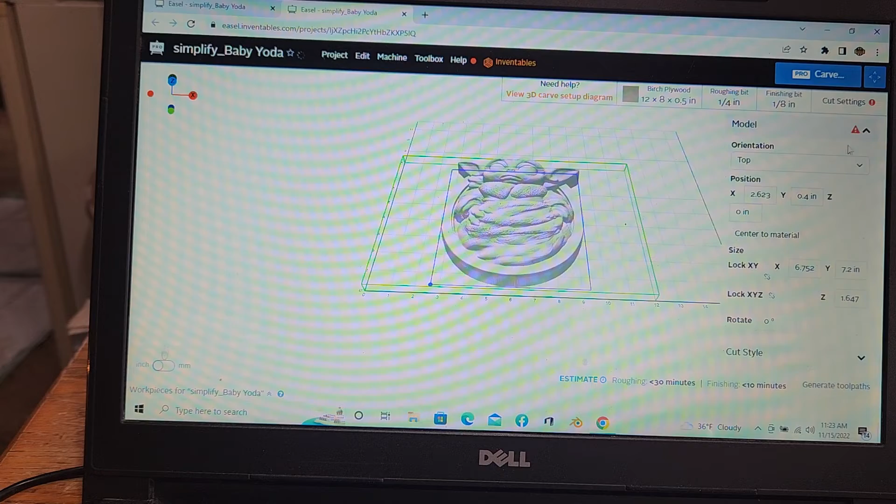Now, as you can see, we have Baby Yoda up on the screen. Now, if you look over in your upper right hand corner, you're going to see you have a warning right here. That's telling you that your model height is higher than your material.

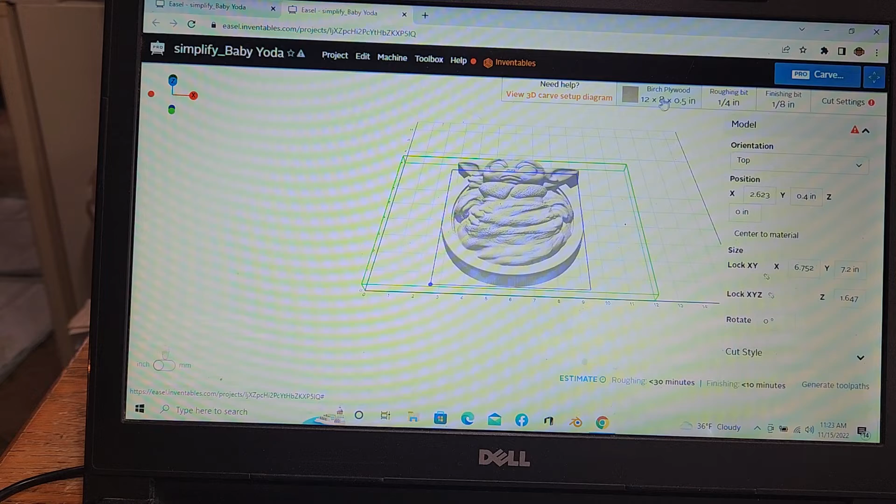So if you'll notice up here where it says birch plywood, type of wood doesn't really matter, and it says 0.5. That means our wood is only a half an inch thick and our model is higher than the thickness of our material. So we're going to change that to 0.75, which gives us 3/4. Now you'll notice we still have our little warning up here.

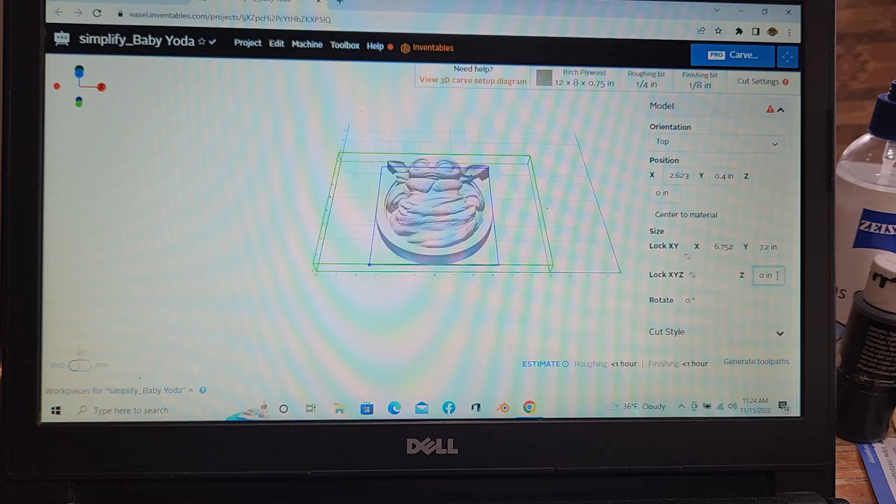The reason being is the Z height right here, down on the lower right. It's a Z by itself. It says 1647. We're going to clear that, and we're going to put in 0.5. And you'll notice your model height dropped, and your warning on top up here went away.

So now that we've done that, you can rotate the material and you'll see that the height of your model is way below the top of your material height, which is the green line on top. So we're going to go back to Z, and I'm going to change that to a number 7. And you'll notice your model height came back up. That's pretty much as high as you can go with this model, with the 3/4 thickness material we're using.

And I will show you what I mean. I'm going to take it to a number 8. And you'll notice we got our warning back up in the upper right hand corner. That says you made the model too high. So we're going to take it back to 7. That's our limit we can go with this model.

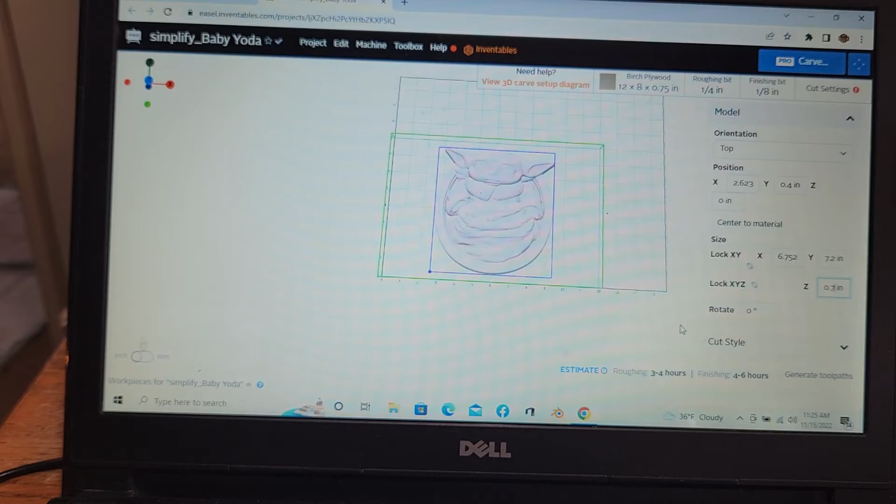Now this is going to be a full cutout. So we'll go down here over on the right hand side, and you'll see full depth cutout with tabs. And if you click on this, it gives you rectangle relief and another boundary relief cutout. But if you're just going to stay with full depth cutout, it's a good beginner one right there.

Easel will do tabs, but they're so thin that they break out. You want to back this up with some double-sided tape. What I do is I take painter's tape, I put it down on my spoil board, then I put the double sticky tape on top of that, and then guesstimate about where the center of my model is going to be when I put it down. And when you make your carve, that way it'll hold it down. It won't let it move.

Easel will cut out, but the tabs are so thin it either will not leave any, or they're so thin they won't hold the material in place. So if it comes loose, you're going to ruin your project. Now when you move down to the direction of your finishing cut, you'll notice that the blue one, x-axis, is lit up.

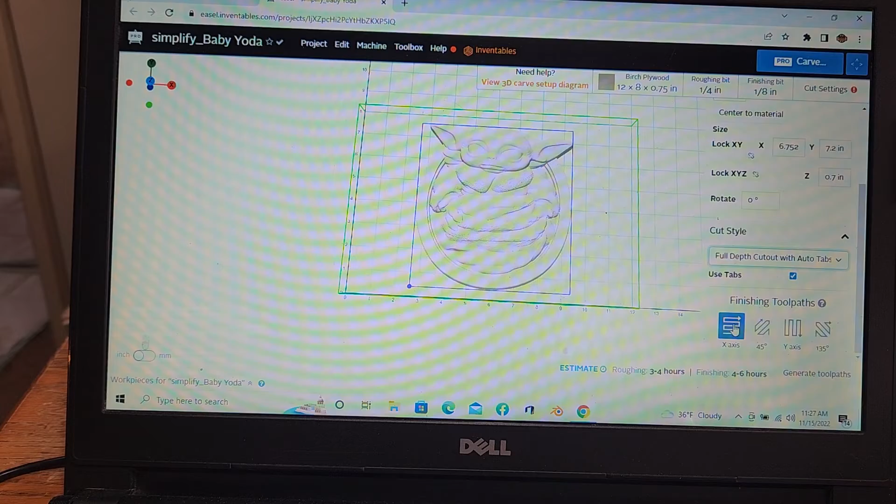That means if your material is turned this way, so your grain runs left to right, when it carves, it will start and carve with the grain, which will give you a very smooth cut. Now, if your material is turned this way with the grain running bottom to top, you want to use this setting, and that way it will start on the left or the right and carve back across the material with the grain.

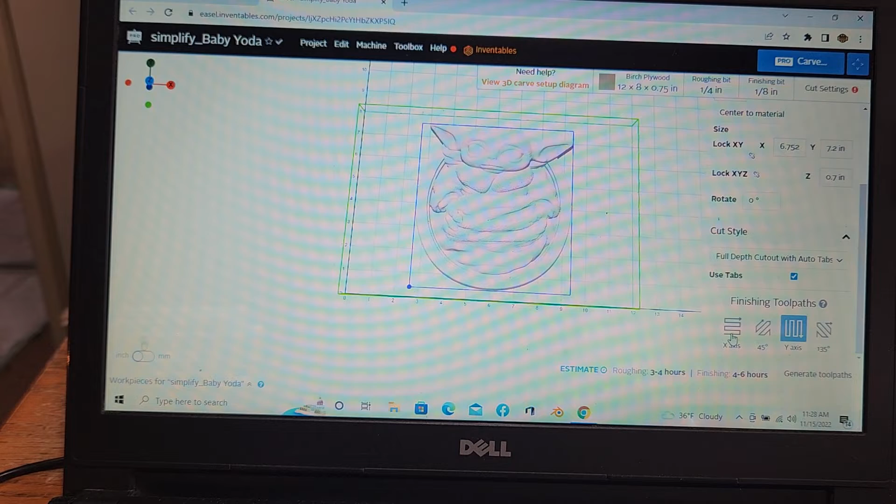Now, these toolpaths don't always run all the way across. They may leave a big spot right in the middle, so don't panic. It's in the toolpath, it will come back and get that before it finishes. I did the first time I saw it, I'm like, oh my carve is ruined. But then I watched the machine, and it actually came back and finished that. As another member on the Easel Facebook group page said, they don't run like a lawnmower, they move around at different spots. So don't panic if that happens to you.

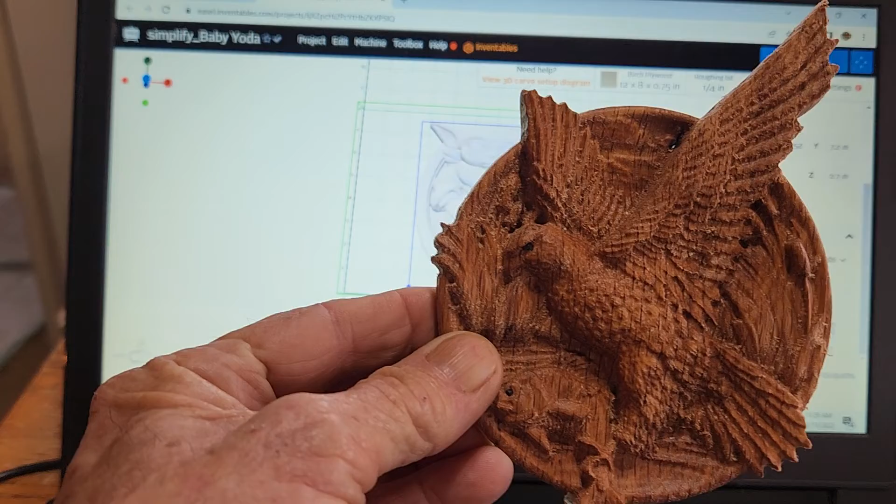Now you can rough this in with a 1/4 inch bit, and you can use the 1/8 inch bit for finishing on this one because it doesn't have a lot of fine detail. But if you want to get into some fine detail, then you want to use a 1/16 of an inch bit, like I used on this eagle. I roughed in with a 1/4 inch, and I did a 1/16 inch bull nose or ball nose as a finishing bit because of the fine detail in the fish and some of the finer detail in the eagle.

This wood wasn't completely dry, so I do have a little fuzzy, but it's hard. It's red oak wood, so it's hard.

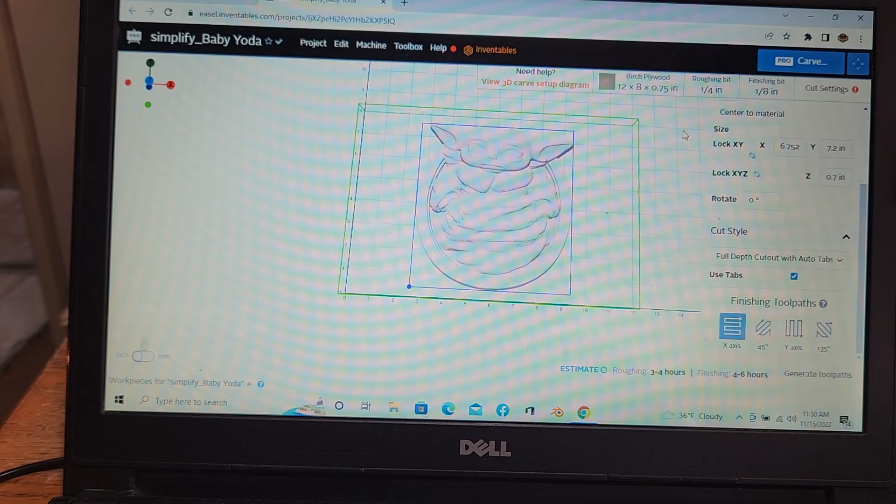And to show you what happens when you forget to set the direction you want it to carve with your grain, when I did Baby Yoda here, you'll see how rough that is. This was totally dry red oak, but halfway through the carve, I realized I forgot to set it to go with the grain. My grain actually ran up and down. I forgot, and it was going across the grain, so that's why I got such a rough carve. Lesson learned, note to self.

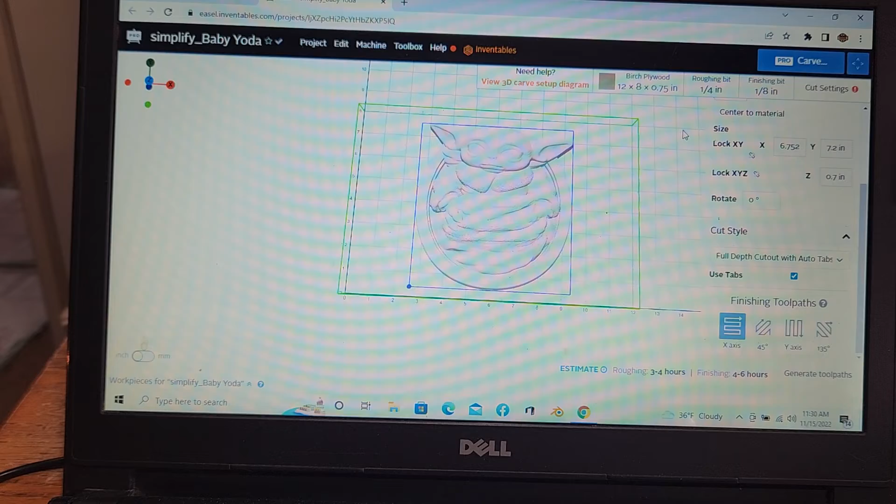Now, as far as materials go, the harder your wood, the nicer your carve, and the less aggressive you want to be with your roughing cuts. But a cheap alternative to get you started is get yourself some MDF. This is the first 3D carve I did, just to see if I could do a 3D carve. I did this with a 1/4 roughing and the 1/8 inch ball nose for a finish. It's a fairly thick model, and I did this on 1/2 inch MDF that I had laying around.

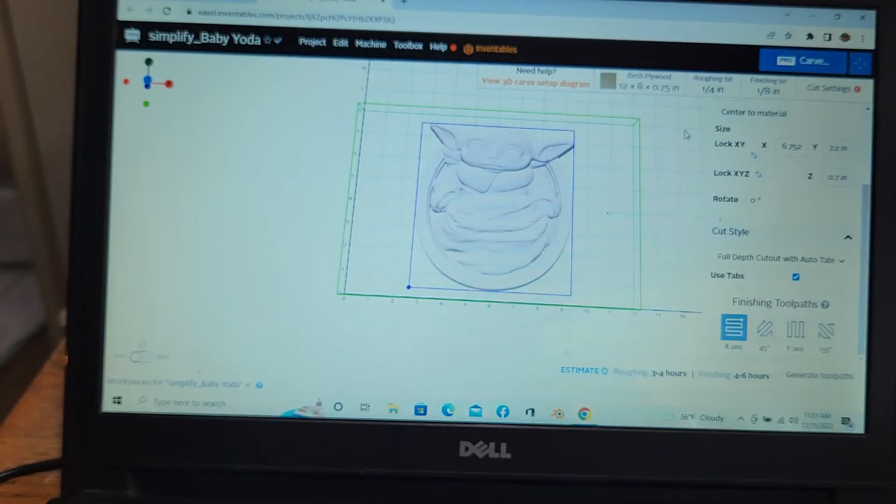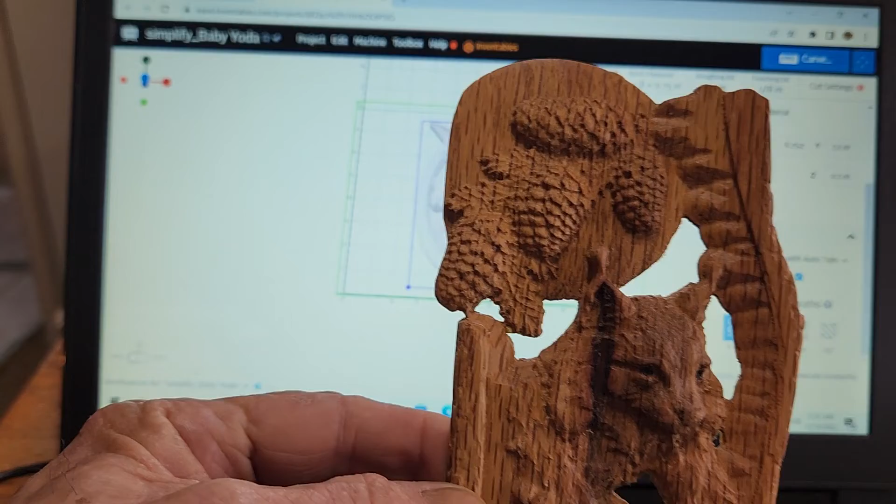So there are materials you can use that are cheap. I mean, oak is expensive. Pine's relatively cheap, but pine is soft, and pine will have a tendency, I think I showed this earlier, to chip out on fine lines. It just depends on how the material is. Like this was done on some red oak. This was done on some pine. But the pine one, the owl, doesn't have a lot of fine details, so I got away with using the pine and the 1/4 inch bit and all that.

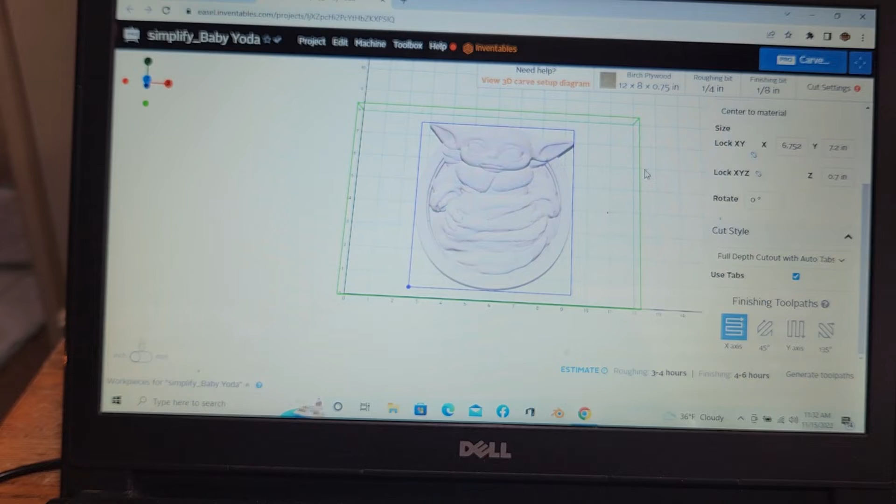Now, let's move on to cut depth and the cut settings. You'll notice on automatic that it puts in 0.28, which is not a lot, it's not going to really cut a lot. So if you click on manual, it automatically sets at 30 inches a minute. That's fine for me, I'm in no hurry. But you'll notice it has the 0.28.

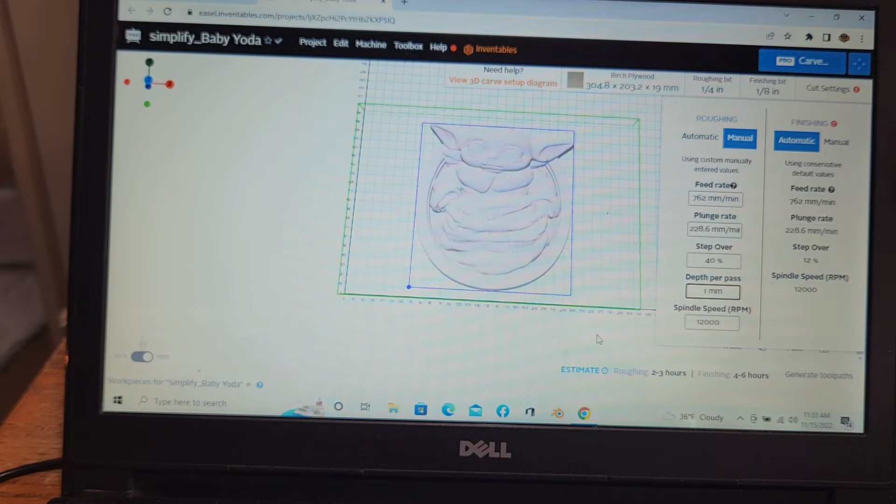So what I've found that helps me get a cut that I know, I deal in millimeters a lot of times on my cut, I'll come down here and where it says 0.28, I'll take that completely out and put 1 millimeter, and that way when it makes its passes it's only going to take 1 millimeter deep. Now if you put in a 0.1 in the inches, that's going to cut 2.5 millimeters deep, which is pretty aggressive.

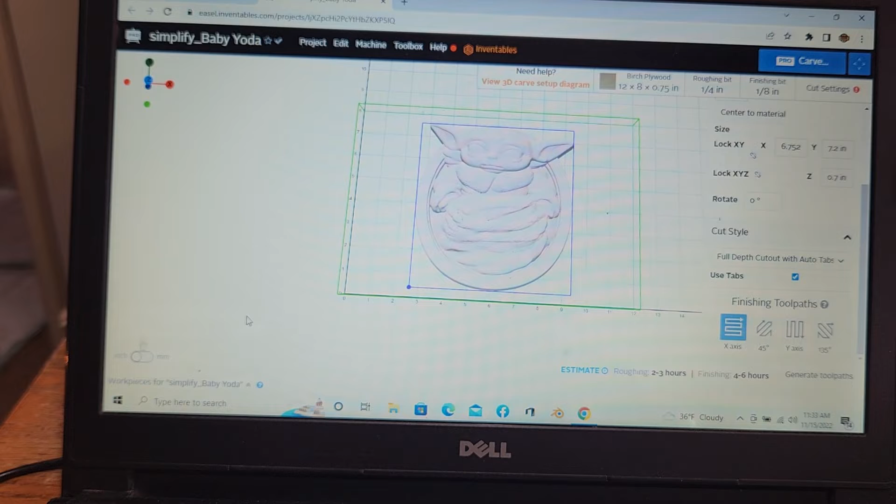On the small machines that a lot of us are running, like the 3018s and the ProVer XLs, that's hard on the spindles and the motors and everything. It shakes all your screws loose and everything on your machine.

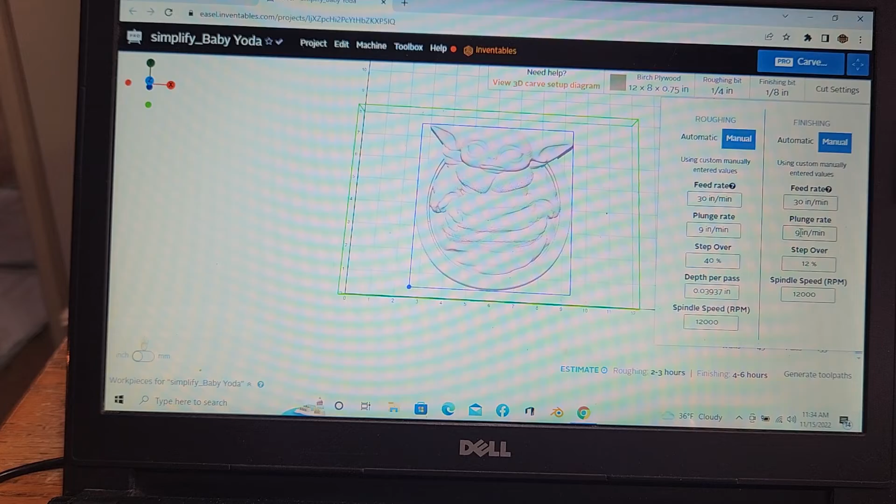So let's go back to the cut settings here, and the finishing is 30 inches a minute. The plunge rate is kind of slow, but for your first time you can change this. A lot of times I'll change it up to 15. What that does is change how fast your bit gets up and down and moves through the carve. Step over, I'm going to bring it down to 8%. That'll give you finer carve lines.

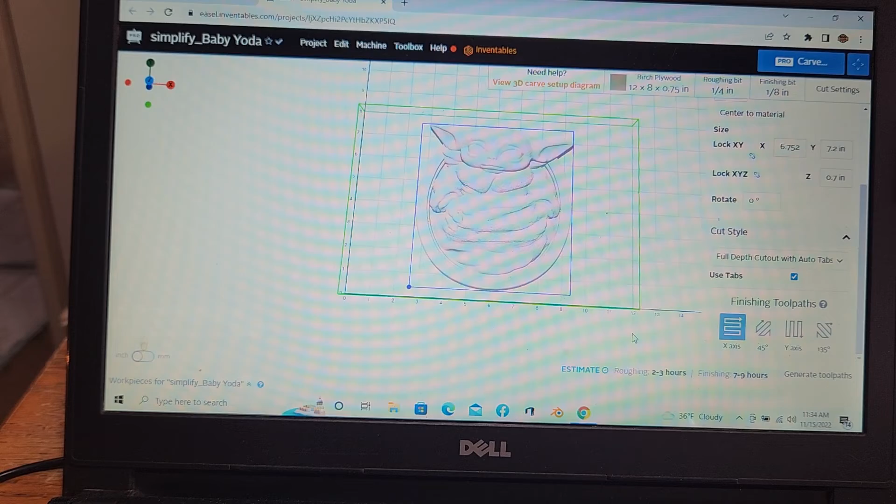Now keep in mind, I'm no pro at this. I'm just going through simple things that I have learned that will hopefully help somebody who is trying to get started and is afraid to get started. So that's the whole deal.

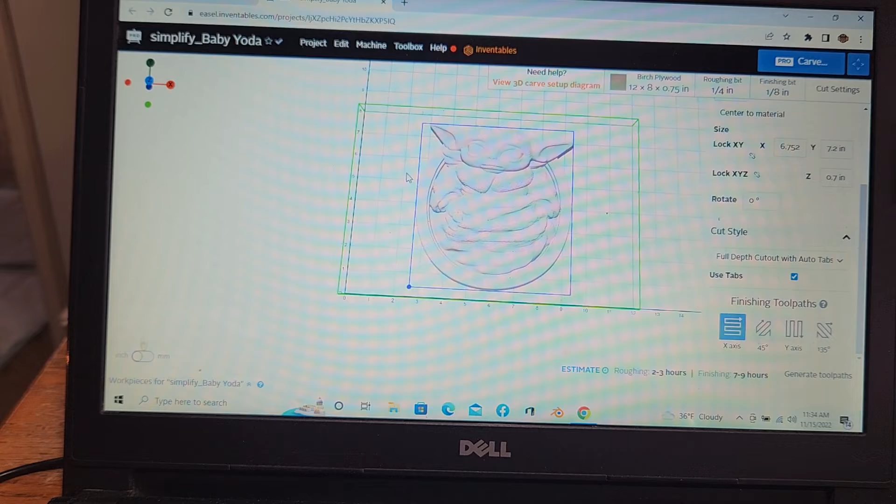Now I'm not going to change this material size, I think I actually did mine at 8 inches by 6 inches wide. If you want to change your model size, you can't just manipulate, drag it, and drop it around like you can in 2.5D.

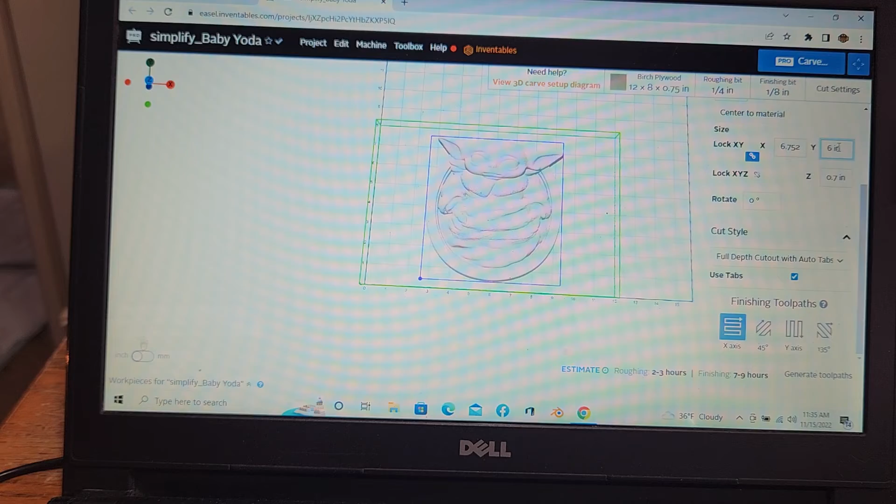But where it says lock XY, if you click on that, and let's say we want to reduce this down to 6 inches, just for an example, you'll see the model dropped. The whole thing resized, but it didn't get out of proportion. When you lock that, it keeps everything in equal proportion. It doesn't get all oblonged or widened out.

So that's how you can resize the height and width of your model. And of course, the Z height right here, that's how you determine the height of your model within your material. If you're using 1/2 inch material, you would have to drop this down to about a .4, which is what I think I did on that Eagle. And you're going to do your full cutout. Just remember, whichever way your grain's going, you want to make sure this cuts with the grain and not against the grain, or you'll have a rough cut.

Now that we've got all that set up, let's go click on Toolpaths. And because we're only taking 1 millimeter cuts on a pass, it gives you a warning that it's going to take a long time to generate everything and longer to rough in. So we'll get us some toolpaths made. It might take a minute.

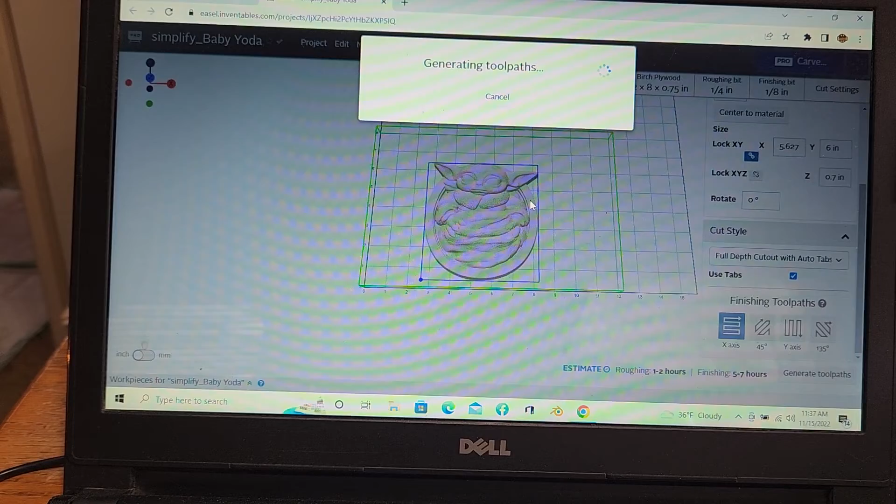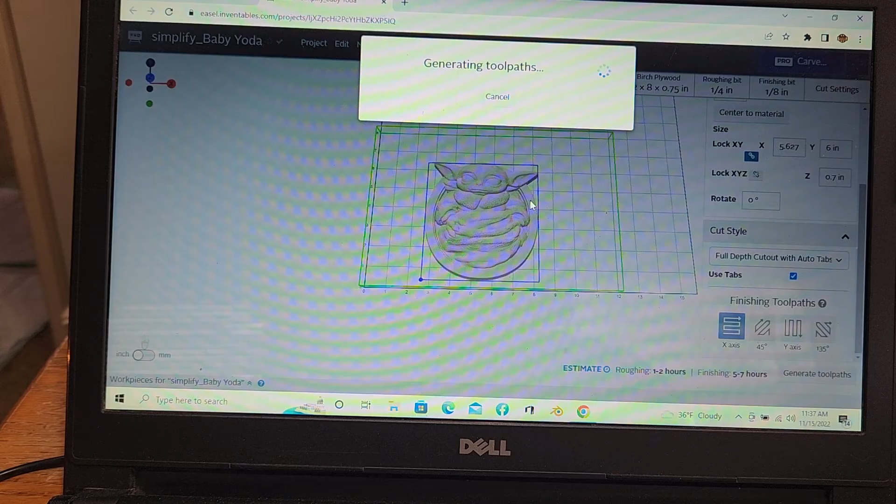You'll notice on the bottom it says 1 to 2 hours and 5 to 7 hours finishing. But once it creates the toolpaths, all of that will change. There we go, just like that. Now we're at 1 hour 56 minutes at 30 inches per minute at 1 millimeter per pass.

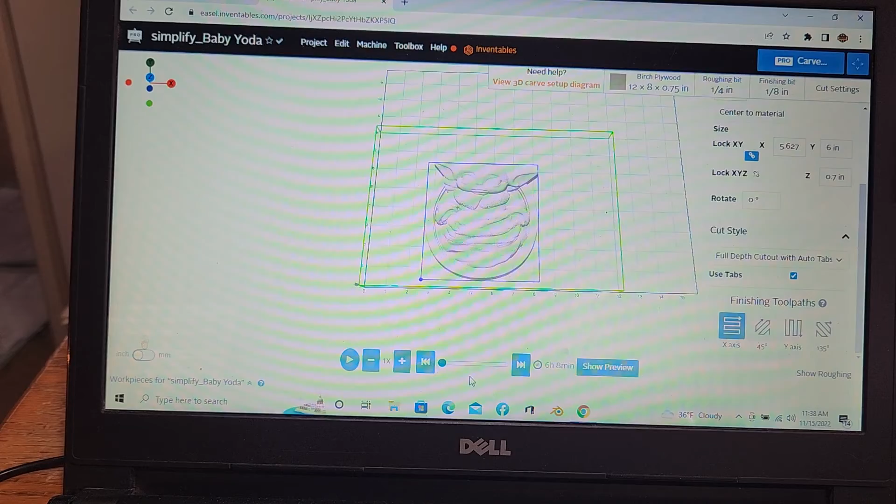Now we'll click on finishing. It'll give us a finishing time of 6 hours and 8 minutes, which is a long time actually. If you go in and change that plunge rate to 15, it will speed up and shorten your finishing time, but we're just doing an example here.

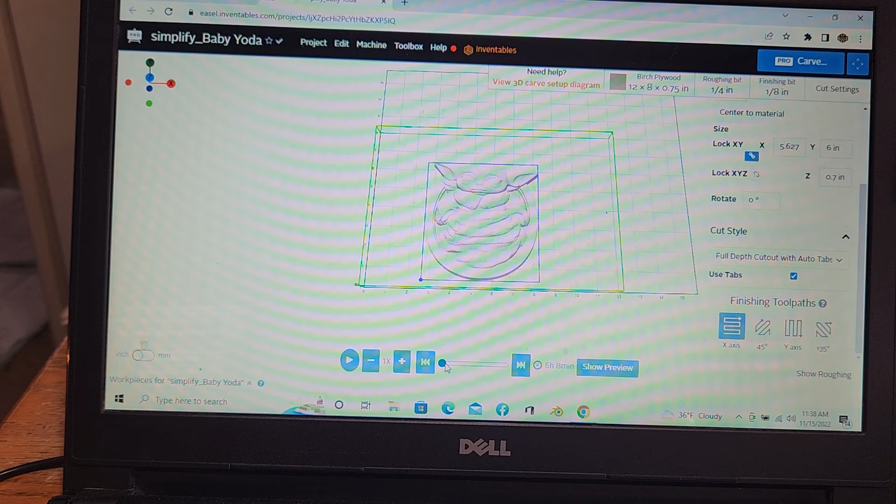Now, if you want to make sure that you have your model height set right and that everything will carve, just put your cursor on the little dot and move it across, and you'll see exactly how this is going to carve. Just make sure you have it set for the way your grain runs. As you can see, it'll be a full carve, with no flat spots showing or anything like that.

That's a mistake I think some people make. If you just run this, when you do your finishing, it'll show you it's going to carve every part of your model that you got in there. Then you can click on Show Preview, and it'll generate a preview of what it's going to look like.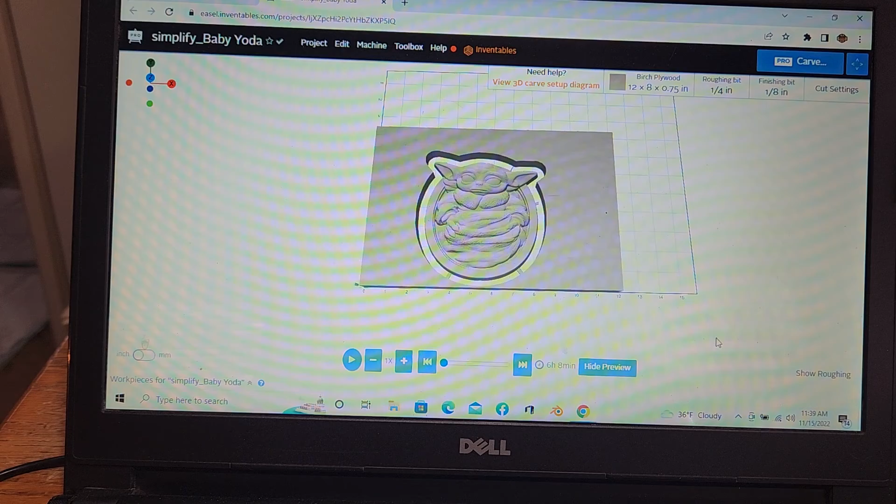Now you'll see it shows a tab here and here and here, but these things are so thin that they will not hold this model in place while it's being finished once it cuts it out on the rough cut. So make sure you double tape this down, or glue it, or whatever you use, or this thing will come loose on you and you'll have a ruined carve, which is discouraging if you spend so much time setting things up.